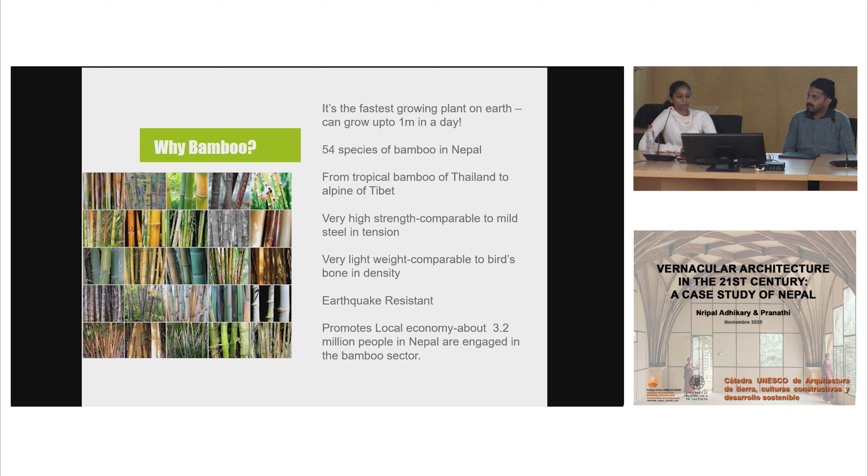At ABARI, we use the research to apply it to our projects, and we'll show you in future slides. We love using bamboo because we have so many species growing in Nepal, and it's one of the fastest growing materials, at par with steel. So not only is it a great material structurally, but also aesthetically. Over the years we've developed techniques to use it in our buildings in different ways.

This was one of the projects. As you can see, the location is quite remote, so we have a lot of natural materials, but we're also forced to use whatever is available around us because there aren't too many roads.

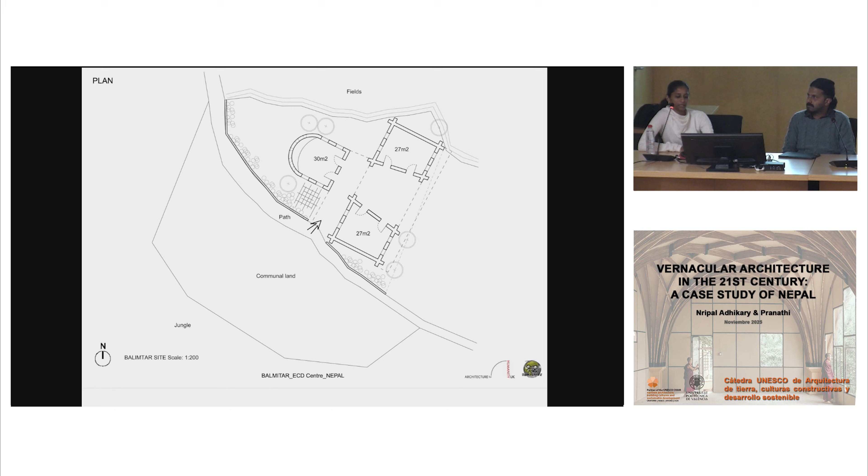This was the school that we built in this beautiful hill region using stone. With all the studies, we saw random rubble masonry and some dressed masonry, but here we had the luck to work with local craftsmen and artisans who dress stone so well it almost looks like brick.

We used this bamboo roof here, and this was at the epicenter of the earthquake that happened. This building was considered safe, and so the whole community used this space during the reconstruction phase because it was marked as safe.

This was actually the turning point of our practice, because one of our projects was demonstrated as earthquake resistant using vernacular and local materials. It really spearheaded our future projects.

Maybe you want to say something here? Yeah, I mean, this was... we worked with very limited resources. We were upcycling anything, like we found beer bottles. As Pranathi showed, this place has no road access.

Actually, literally, if you had to get nuts and bolts, you'd have to walk three hours to get them. So it really forced us to be innovative in using whatever we had.

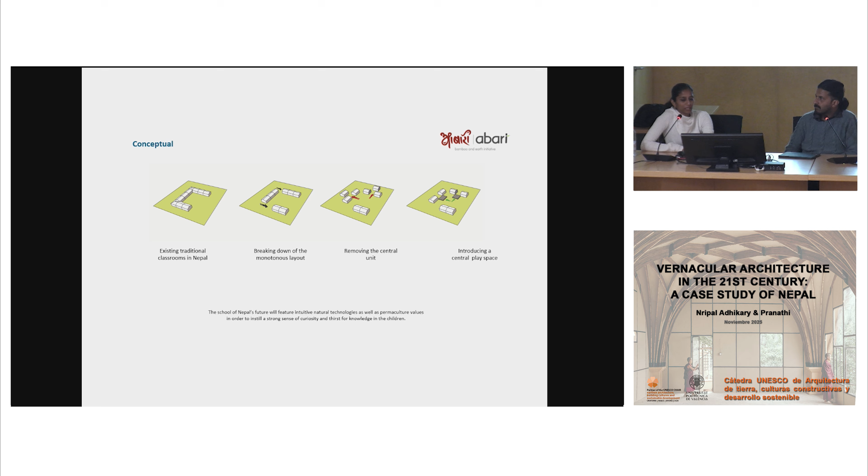We had workshops where women attended and made these compressed earth bricks. This is more about the typology of the building.

We didn't really want to change the design, because, as anywhere, governments tend to be conservative in their design.

So we said, okay, you can do this—mind you, this was open source. We put all the prints, all the details, everything on our website, and put it out there. So the only things we changed were how the walls were built, using local material.

We changed the ventilation so the air can go out, so it becomes thermally comfortable. And we use natural paint on the walls.

So some very minor tweaks that made the building more inspiring and more livable.

Traditionally, government schools are made with concrete blocks, only about 15 centimeters thick, and sometimes left bare because they don't have money to finish them. Then they put a metal sheet on the roof and it gets super hot or super cold, which kind of defeats the purpose of a building—whenever it's hot you have to go out, and if it's too cold you have to go out in the sun to get heat.

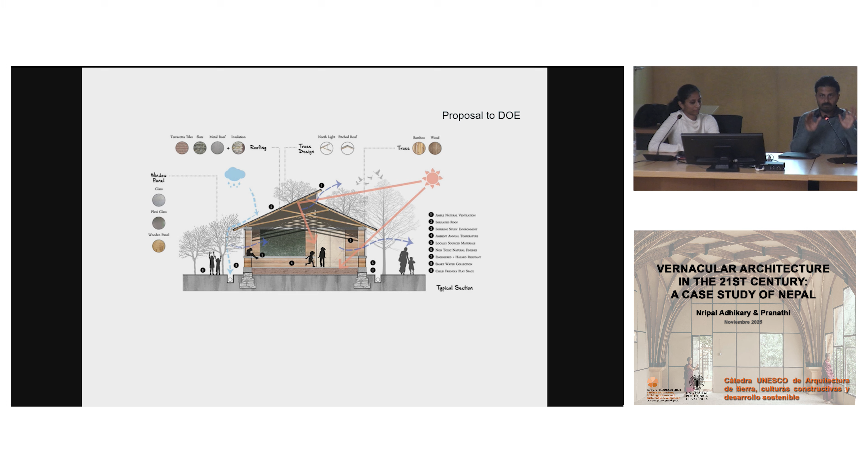So we said, okay, take your design but make it with earth. That was our idea.

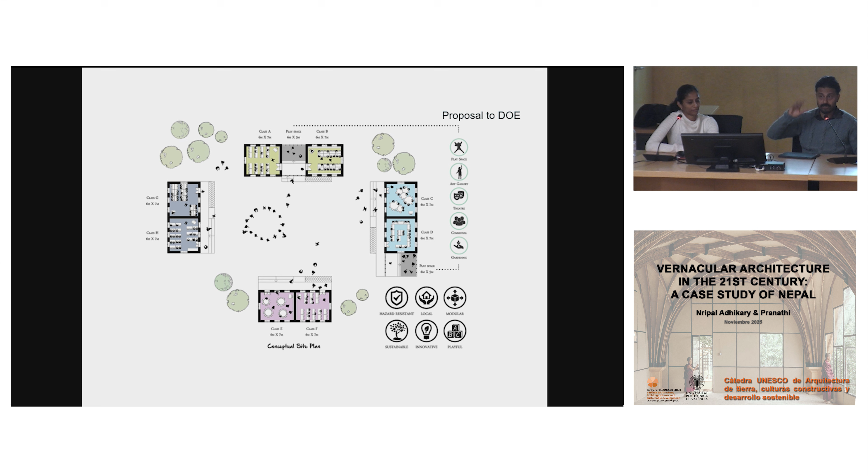And we added a few things—we added the play space in between, and we made the building modular. In an earthquake, they say the safest building is a round one because it has no corners, then a square, then a rectangular. But if you want an L-shape or other forms, it becomes very tricky and you need more reinforcement. So we made modular buildings you can arrange according to your contour—mind you, we're in a very mountainous region, so we put it differently.

Using that typology, here's the first school we did. As you can see, it's in the mountains—you don't see any roads here. It's almost impossible in terms of conventional building.

You see, these buildings are right on the cliff. It's really challenging.

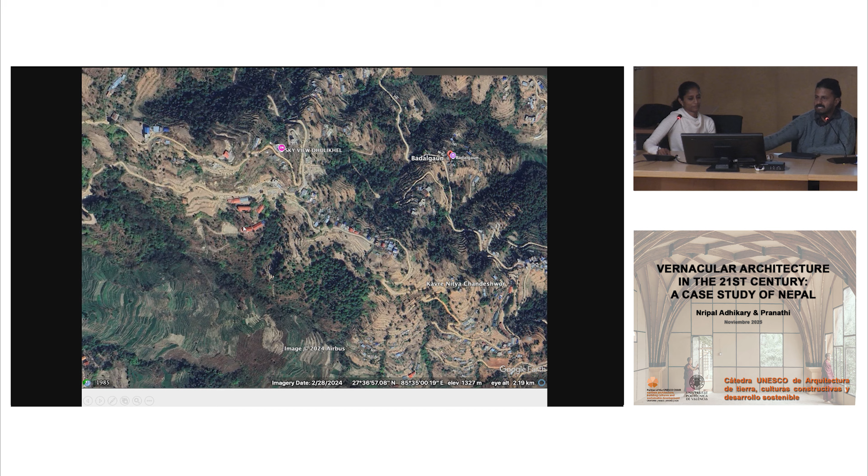I think this was the success, even before we made the building, where we had a lot of women and children partake in the workshops, and we changed the design of the earth press itself so that women could use it to make the bricks. And so it was a successful demonstration, not just to build the schools, but we also had it replicated: some farmers used the technology to build their houses as well.

Yeah, and if you look at the budget, 54% more or less goes to the material, and about 35% to the labor. So about 11% goes to steel and concrete. So basically, 89% of the budget goes to the local community. And many times people ask me, what is the budget of the building? What is the cost? And I say, whatever the cost is, it's a good cost because it's staying in the community.

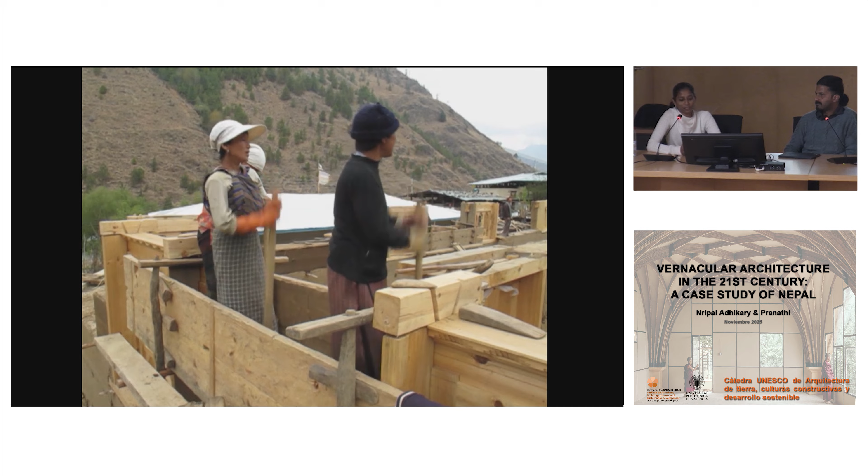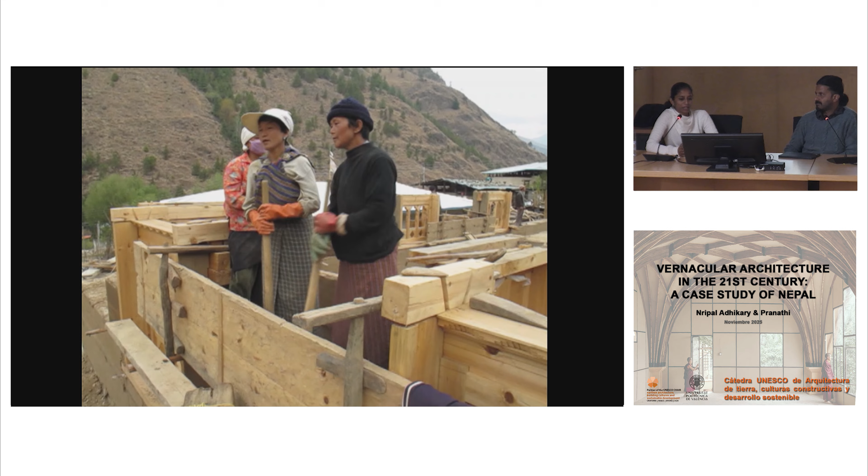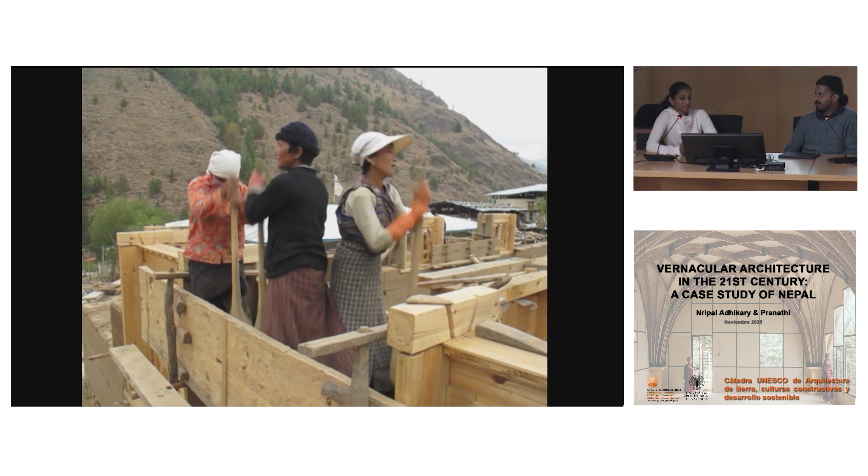So this is an example we really love showing because this is in Bhutan, and this is traditionally how they do the rammed earth there. As we were studying the typologies of buildings, we were also looking at the construction methodology. The formwork was something that we studied in depth because traditional buildings had thicker walls, and this formwork was only allowing them to do a few meters a day. So what we developed over time was how to do it faster, but we wanted to keep the beauty of the way they ram. So we took it and we applied it a little bit differently, which we'll show you.

So we made a formwork which can be taken apart in parts, but at the same time it can build a whole wall in the same day. We used some steel parts, so it's easy to assemble and disassemble. And it was very important for us that the formwork fit in the small truck, because that's the only way we can move things in the hills.

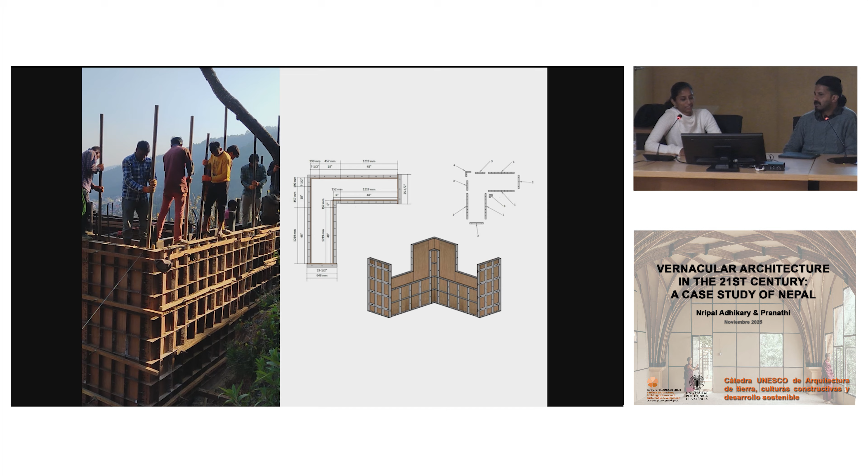This is the inside of the rammed earth. Mind you, we are in a very high seismic zone. So one of the innovations Pranathi was saying was taking the rammed earth wall, traditionally about 60, 70 centimeters, back to 40 centimeters, and making it multi-story. And also, traditionally they had the formworks very small, so you can only do sections, and then somehow you have to plaster it. So we wanted to avoid that. So we put this mesh and then a reinforcement on it. Actually, we've just done a sample of this at the UPV, at the lab, so if you want to see how the connections are in person, you can go visit it there.

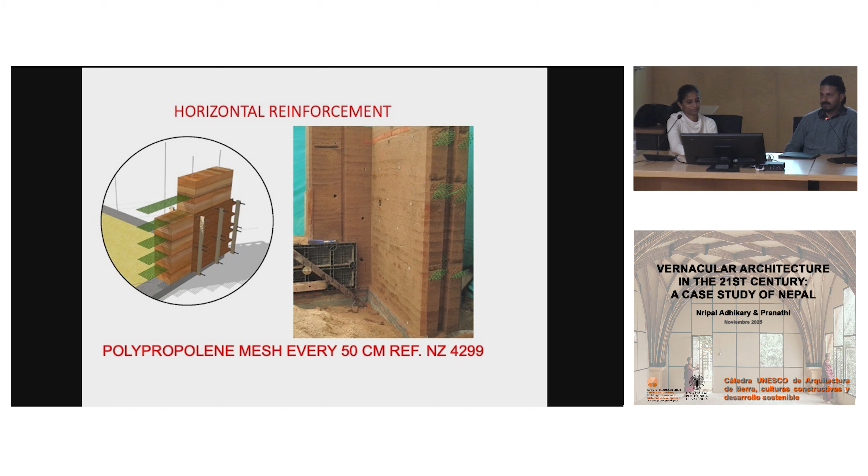And every time we travel in Nepal, we try to collect clay from everywhere we visit. So this was something that we developed over time as well, to use different forms of clay in the interiors of the wall as a finish. And the formwork also allowed us to play with different shapes and create patterns, because it allows the interior of the wall to be created in one go.

And you can see there's this formwork here. So it also acts as a scaffolding. And one major innovation, as we said, is you can build one huge section in one go, right? And then you can create these beautiful murals as you build. It's a really nice Zen process of building. It's like building art as you go.

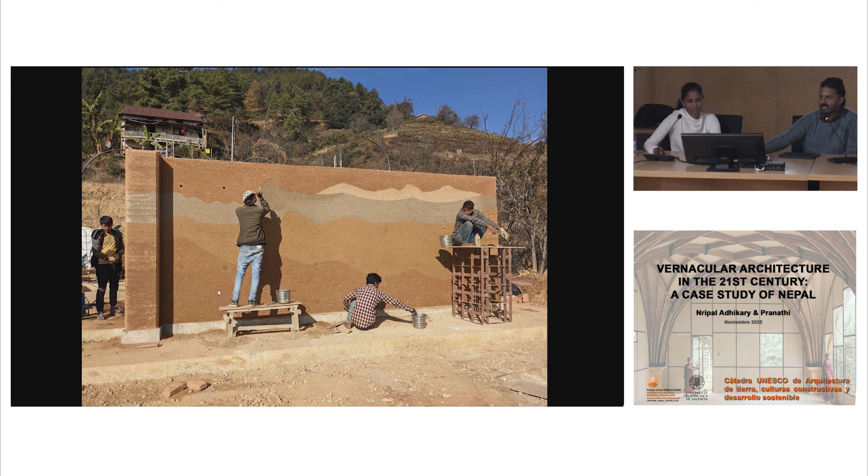So, before the earthquake, with all this innovation, we were building in the most remote areas of Nepal, as I showed you earlier, where there are no roads, because people in the city were not interested. They thought it was only for rural areas. And after the earthquake, we got a commission to do one of the largest archives of books in Nepal. So this is right in the city. So it was a big vindication. Now we're building with earth and bamboo right in the center of the city. So it was a big deal for us.

So here's the interior. Here, what we wanted to advertise: bamboo is considered a poor man's material.

There are some modern people who want to use bamboo, but they want to hide it and cement plaster it so it looks like modern material. But we're like, no, it's such a great material, you have to advertise it. So we expose this.

This library is built in such a way that you're not allowed to access these books, because these are rare books. So you go to the top of the office and look at these books, and you can see the structures within it. So it kind of creates that gaze and these lights, highlighting all the bamboo.

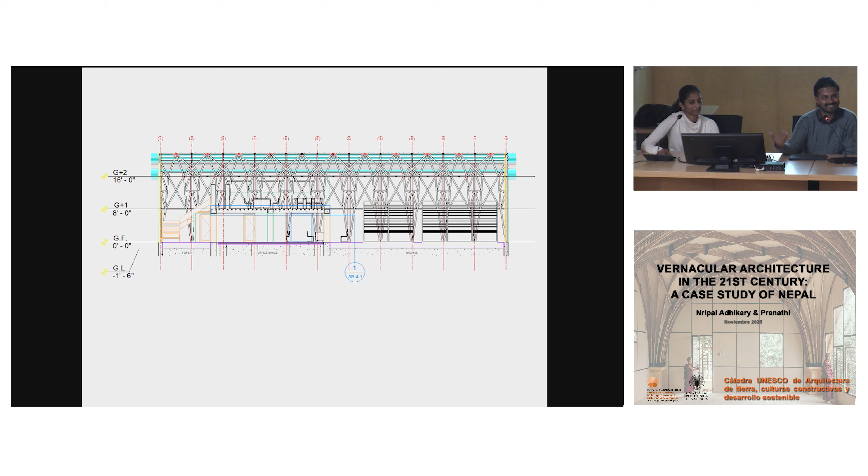Next, here's the cross section. Here's the bamboo. As she described, it's such a lightweight material. People compare it to steel. Steel is strong, but it's heavy. Bamboo is strong and lightweight. It's more like carbon fiber, if you want to compare it to modern industrial material. I don't know if you know this, but the Wright brothers, when they first built their prototype airplane, used bamboo because it's lightweight. And here's the cross section to show that the roof is separate from the walls.

Next. Our interest is also in designing public spaces, because we feel there's more need in the country. With bamboo you can create a larger span and use local resources, and it's cheaper. So another project we did was a school. This is also in a remote area that is developing, a growing city. So the idea is to use the resources and to come up with a typology which can be replicated.

Yeah, here it was important for us that it was part of this early childhood village. It was part of the preschool, and the younger generation of the school was using this space. So here it was important that we have these elements which are rammed earth, but also these semi-open spaces in between where the children can play and use the space differently. And here we used shingles, like bamboo shingles, on the exterior.

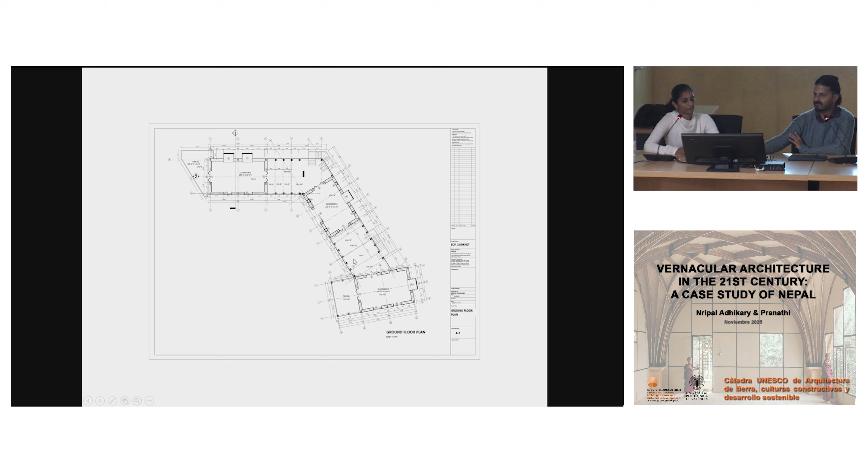And we're working in a very limited area. It's passive solar design, which is most of our buildings. So we opened it, you get the biggest sun exposure from here, in the south. So you get this sun exposure, and it warms the classrooms, and also it allows the space to be outside. And then we make the pathways with sand and vegetable plants, so kids can run around. We try to save all the trees. This is a big mango tree, so we built this balcony right next to the mango, so kids can go out and just pluck the mango and eat.

Yeah, it was important for us to have this green element because we are set amidst a farming community, and we wanted to incorporate those things into the building as well. And we also had some workshops with the children and some of the teachers to come up with the designs for the birds on the walls and everything. And also the truss doubles as a jungle gym, kids love hanging from here. So it's a truss and a jungle gym combined. We encourage the kids to be on top, so when the teachers are in the classroom, the kids are on the top.

And here's a different weaving. Bamboo is such an interesting material because when it's young, you can eat it. Up to 3 months, it's very soft and succulent. You can eat bamboo shoot. And if you don't eat that, you let it grow, it becomes a plant. And then for 2 years, it's kind of soft. You can cut it and use it in fibers. Now there's a lot of bamboo fibers, the fabric, so you can use it in textile. And they say if you don't use it even after 3 years, then it becomes strong and very hardy. Then you can use it for construction.

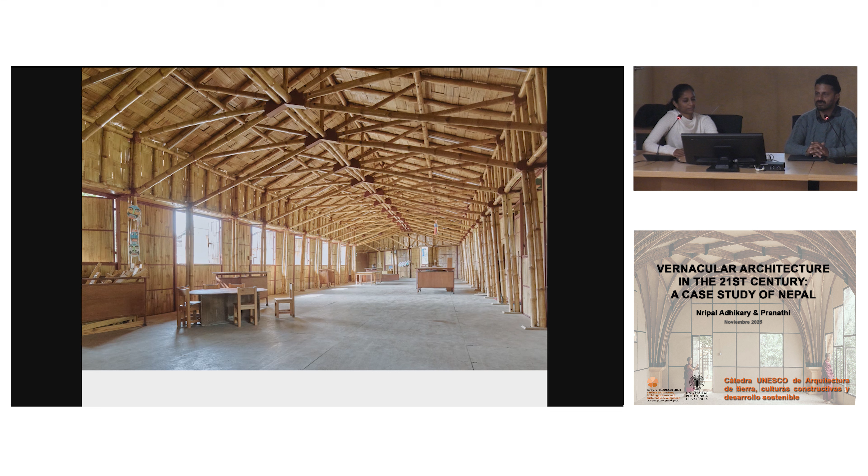And here's the big open area where they do the performance, and that part we've left open. It's pretty big - 8 meters wide and 30 meters long. So the top part is lightweight and the bottom part is rammed earth, which creates a nice structural and visual balance.

This is a small house project - it's our house in the city, and this was our COVID project, or rather just before COVID. We really wanted to continue our work even though we didn't have any other projects going on during those 2 years, so we built a small house in the center of the city using rammed earth.

It's also designed using solar passive design principles. The 2-story rammed earth structure is where the rooms are, and the other spaces capture the sunlight and transfer the heat into the house for other functions.

A lot of people say, can you build rammed earth in the city? Because in the city, of course, Kathmandu has a population of almost 5 million people, so the real estate is very expensive and limited, and people want to build as small a wall as possible so they can get more space.

They think with earth you cannot do it, but we're like, yes, you can do it. You can even have a garden, you can have a space that's warm. So as she said, we wanted to do passive solar. So if you notice...

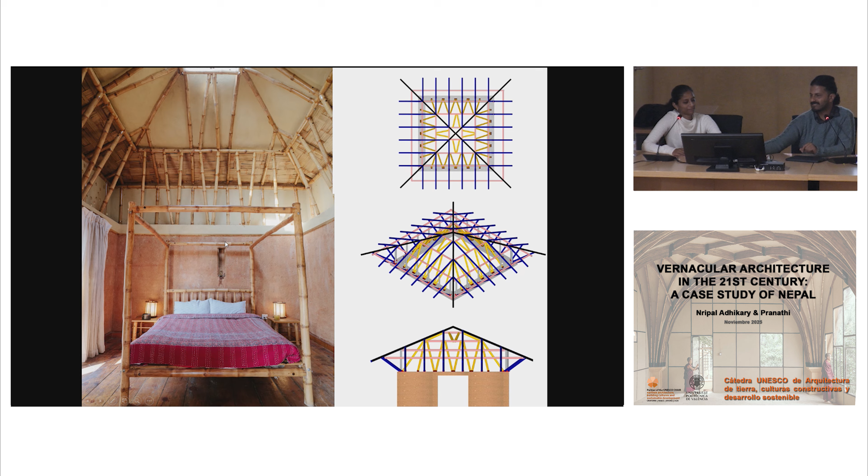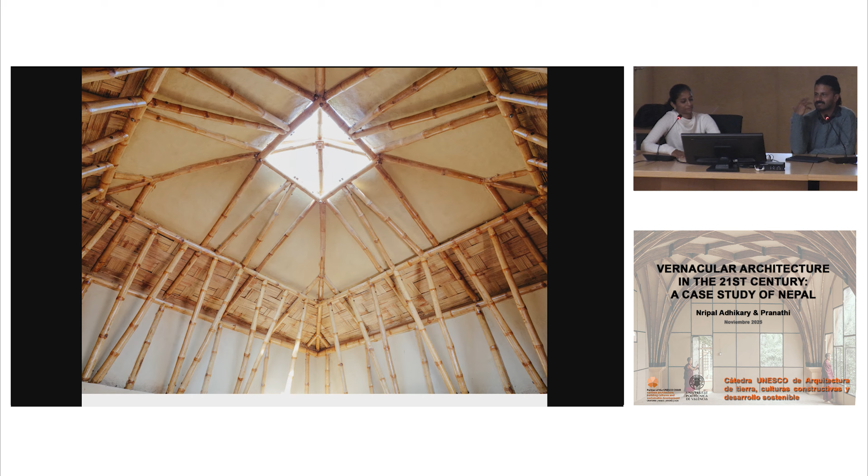Here's the mandala with nice earth plaster, and then we exposed a layer of bamboo and then another layer of earth again, which creates this very interesting visual vocabulary.

Here's how rammed earth connects to the bamboo, so trying to show that it is a contemporary material in Nepal, because it is traditionally used all the time. Even now, if you look at the census, 75% of construction is earth-based, but modern construction, let's say 99%, is using steel and concrete. So we're saying no, you can do contemporary structures.

Here's another major innovation. We had another turning point, like COVID was one of them, and then we had this collaboration with Camilla and Fernando helping us with learning about Bovedas, with Salvador, who came to visit us, and we did this workshop. This was a turning point because the way we saw roofs totally changed after this, and we were able to use a local material, this brick made very close to where we live, and we've been having so much fun with it.

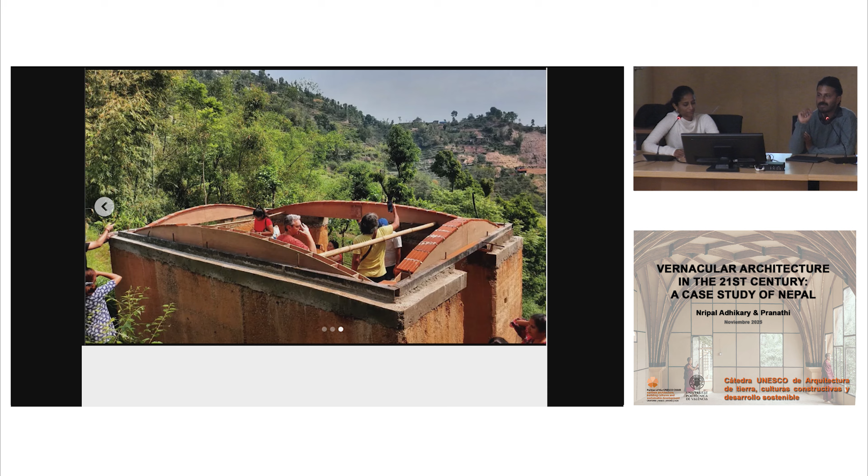These tiles were only put on the floor as floor tiles, and then we were like, okay, we use this on the roof, right? So here's the process, using these small 15 by 15 tiles and putting it on the roof. It was just a small change in the form, but the materials were available there, and it was so exciting.

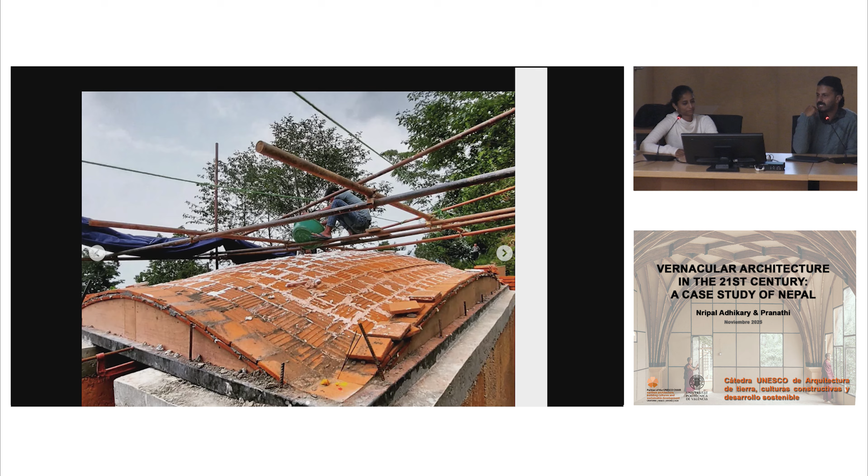Once we did this, we did one structure, then a couple of structures like this, one 4 meters, another 4 meters. We don't have the photo of that. But remember we're doing a lot of school projects, and there was another project where we had to do about 200 square meters of cafeteria. We're not so comfortable with 200 meters yet with one single boveda tile vaulting. Let's do bamboo, and also there are a lot of little kids, so we didn't want the liability at this point. So we used the same typology, and then we went with bamboo.

As I was describing, bamboo is a hollow surface, and the strength comes longitudinally with its tube. You can cut this tube into small strips, very easy, just take a knife and do it, and it becomes super flexible. This is one piece—you just bend it like this without any need of heat, and then you laminate multiple to get the desired shape we want.

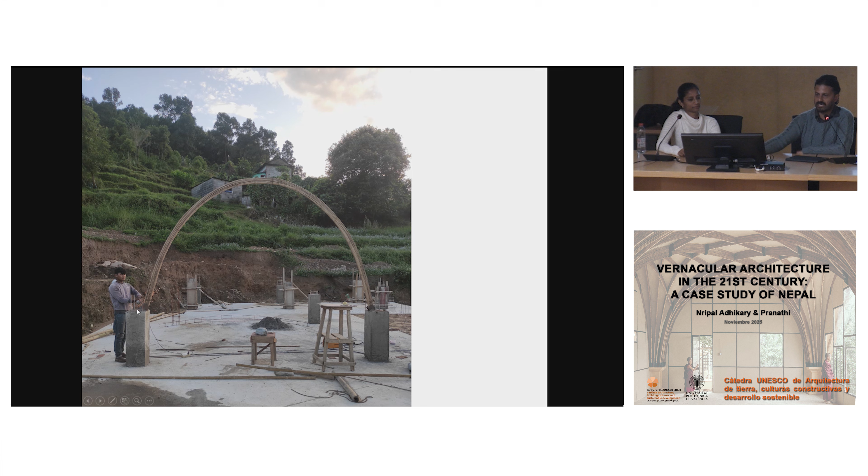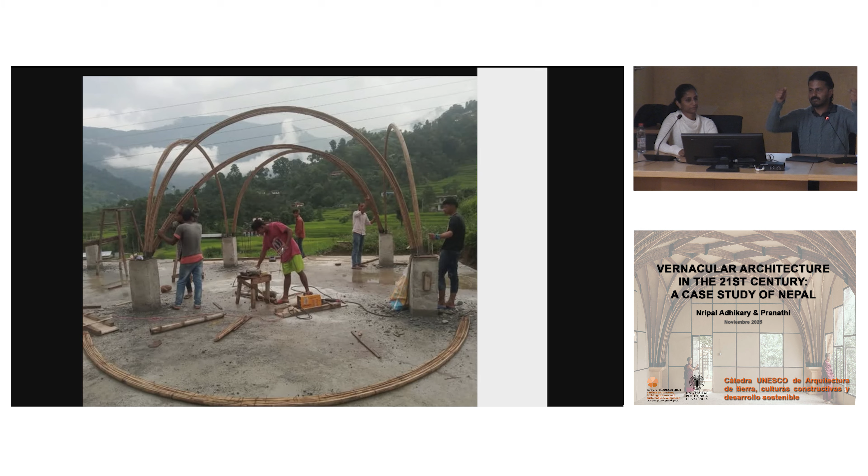Where there's a lot of thrust, we have a concrete beam. Then we started doing this, so we prefabricate these elements and then add them. The generating form was a bit tricky, but once you do it, you just have to make a jig—you put the thing there, carry it, and put it on top.

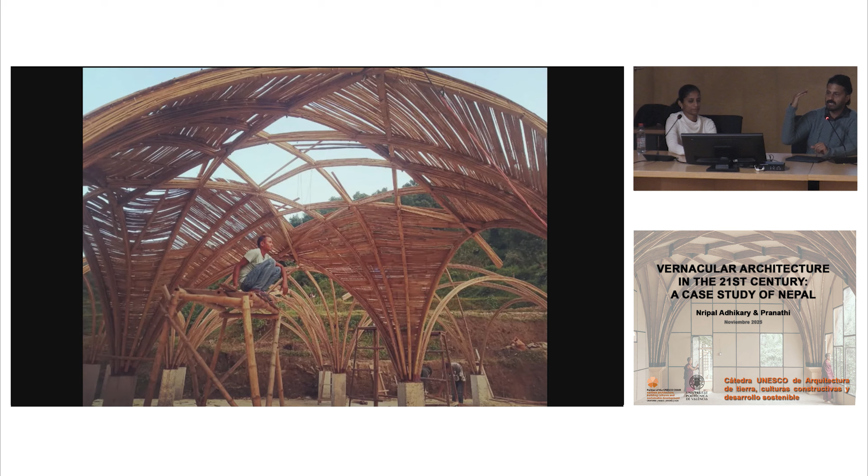It's modular—we just keep increasing it. Here's a construction photo. After we do this, we add a layer of bamboo on top, right? It's a pretty big space—this is like a cantina for kids.

We wanted a very playful area, where you can just walk around. Here's a small video—once you put the layer of bamboo, then you plaster it. It's very simple; if you think about it, it's literally earth and grass—only earth and grass—and you're building these structures. You don't really need much.

After this, we put some earthen paint—these are red clay, yellow clay.

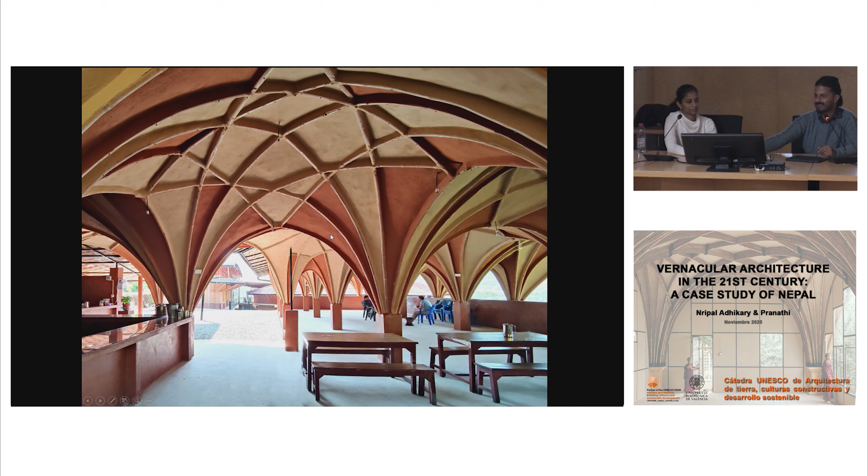Another example—everybody came here wanting this. Here's the thing: we had a secondary roof because these are dome after domes after domes, creating these valleys. So in order to avoid water coming in, we added a big roof on top of this, like a pitch roof.

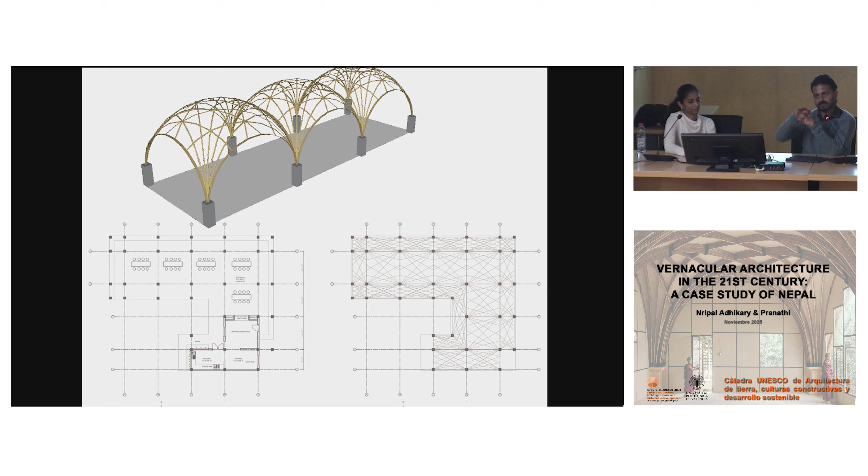Here's the one module, right? This is repeating, and here you can see all these ribs. These ribs are what makes it rigid and earthquake resistant. So our next dream is to have these ribs and then have smaller prefabricated earthen panels, earthen bricks that stay on this, creating even more thermal mass.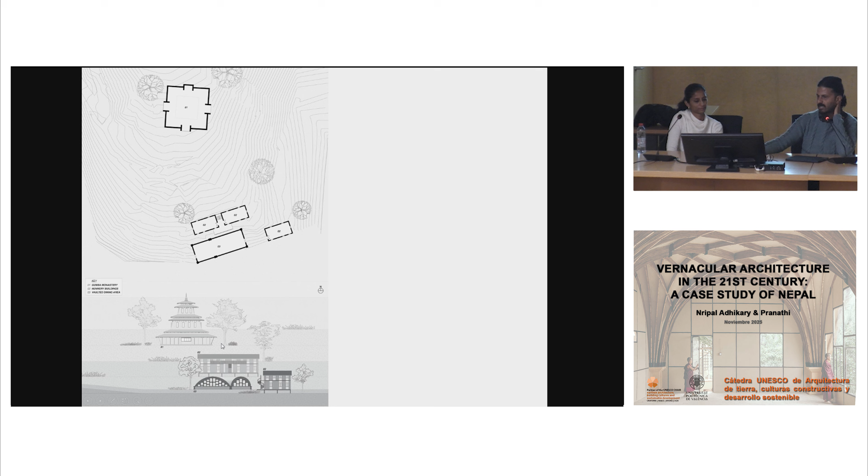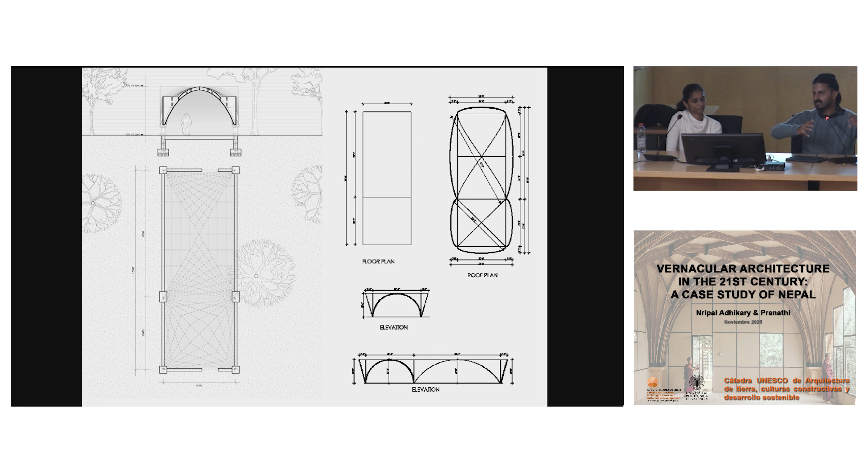Here is the canteen that I was talking about. So the earlier one was a 4-meter module, and this time we said why not, let's go bigger - let's do a 17-meter module. So we prefabricated them, and here you see this 2-person team goes to the top. You don't really need much tools.

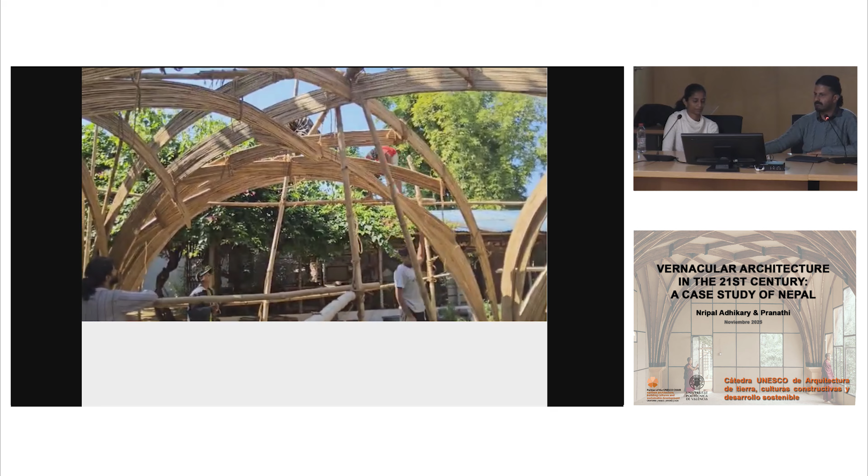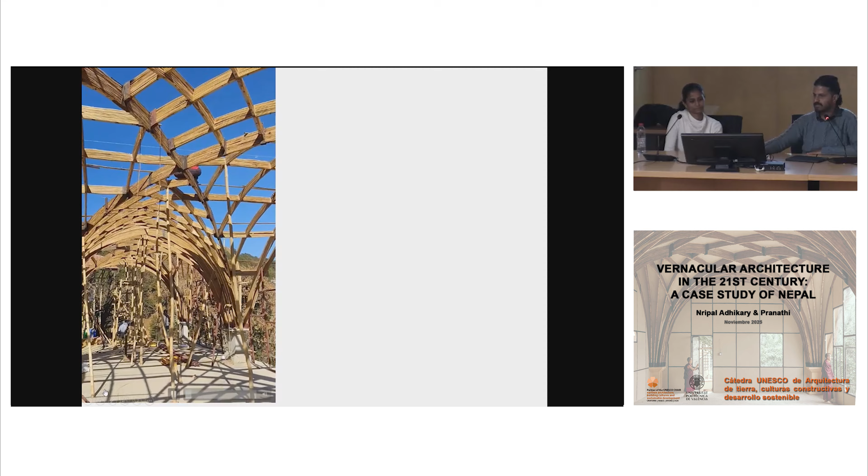Then you prefabricate them in a studio, and then we just bring them and put them in place. One panel is not more than 5 kilos, but it's huge.

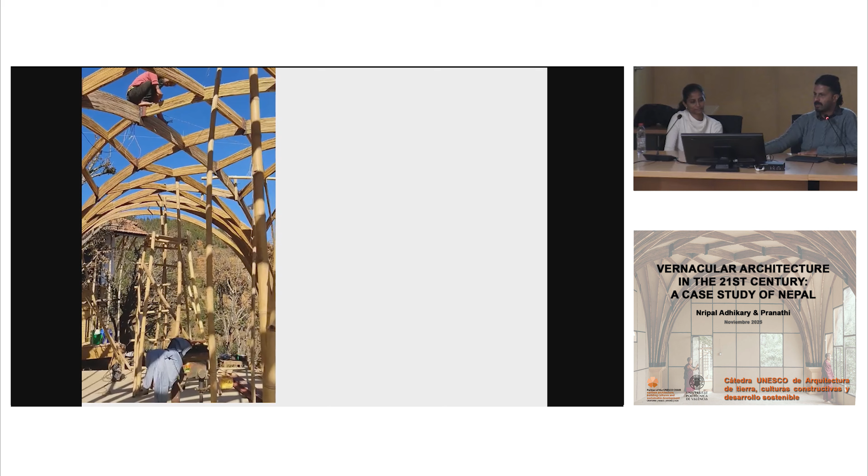So here's the interior with this bracing. Then we did a secondary layer of waterproofing. This time we didn't have a secondary roof - inside is earth, and the outside is a layer of waterproofing concrete. Here we've used concrete, but I also wanted to demonstrate that it can really take the load.

So we have this kind of Gothic looking arch, round arches with waffles, and earth paint. There's huge glass windows to the side, this concrete pedestal, and here the happy monks doing their daily walking.

So many people come here to visit, to get inspired, to meditate. One thing we found is, by default, these materials have such a spiritual quality that it's a really nice area to meditate.

Here's some of the details - really the ribs are not more than 3 centimeters, but super strong. And here's the inside, here's the living area. This is built with compressed earth block with different clay, and this is wattle and daub.

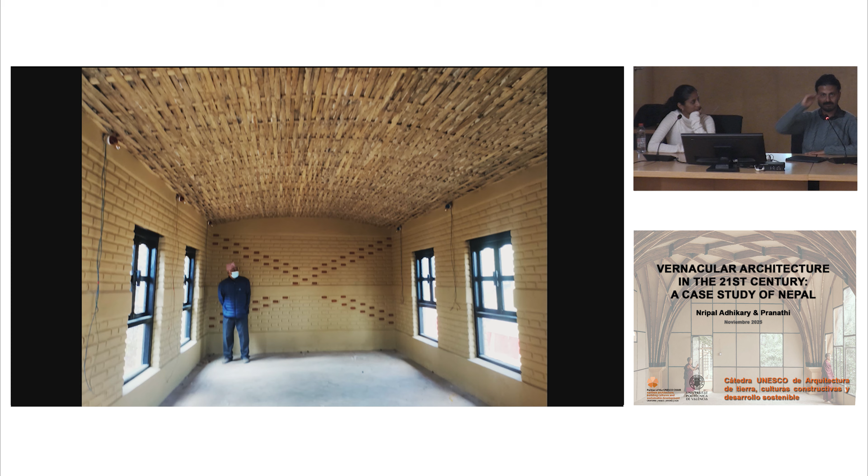Like 20 people jump on it and nothing happens. Remember, these are kids running around like crazy, but there's no flex, it's kind of nice. It's got this very interesting thing - we put the gypsum on top, not on the bottom, just for protection from cavity.

And this is the interior of the big monastery, where we have these inclined columns. These are with steel - it also works kind of like an arch, all the pressure going downwards. Here, when you look up, you have this beautiful mandala.

It's got this triangles and squares and triangles, and the lights are coming through. So this is what you see when you look on the top, and this is from the side. It's very zen - we didn't want many colors, just the earth plaster.

Here people are meditating with natural wood finish, also not polished, because it takes out the smell. With earth and bamboo, it's got a very nice smell - it literally is breathing, kind of symbolic of these people who are meditating inside. Here's the outside - this is rammed earth with bamboo frame, and then the wattle and daub, lightweight.

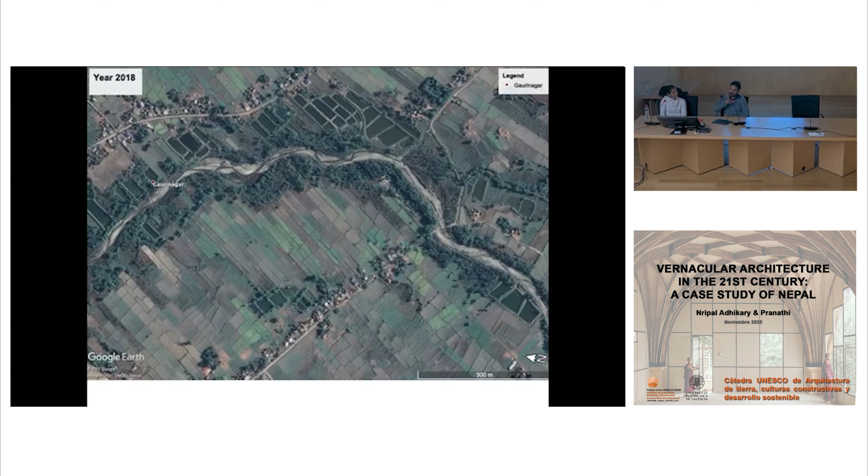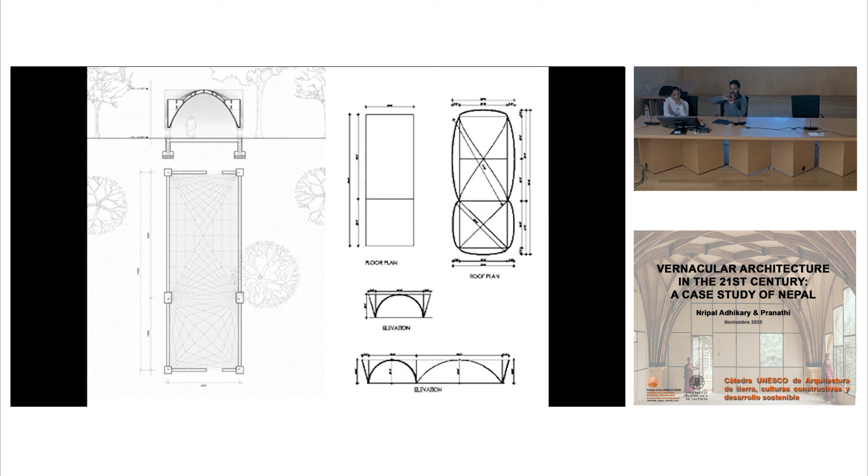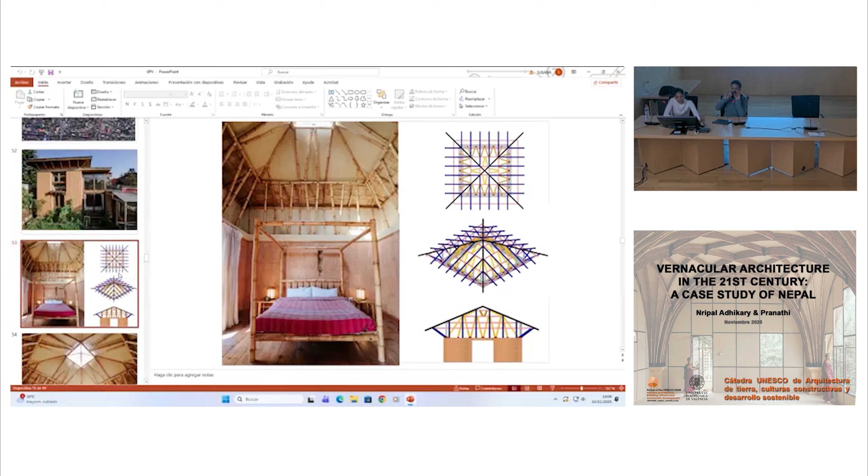So we have two kinds of joint. One is a bracket joint. We make a 5 millimeter steel piece, and then we make a certain bracket according to the specific joint, so it changes. You insert that, so there's a steel connector, a little bit of steel that connects it, and that gives homogeneity. You can actually test it because the major failure happens at the joint, but at the joint we have a little bit of steel, so you can look at it.

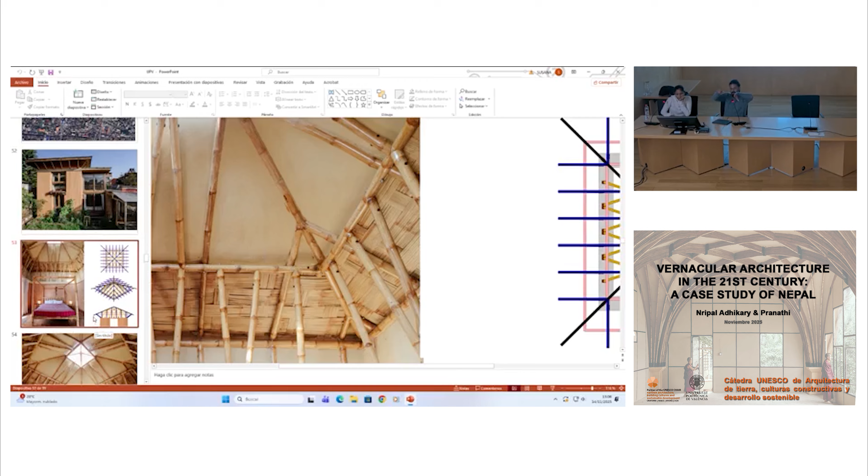The other connection is fish mouth. So we have bamboo, another bamboo, and then a small steel joint, about 35 centimeters, that goes inside. This is called a fish mouth because it's a handmade joint, and it's actually slower. This was a more artisanal joint, but in more of our commercial buildings we try to use the brackets like you see in this one. We prefabricate the connection and it's really easy to build, like Lego.